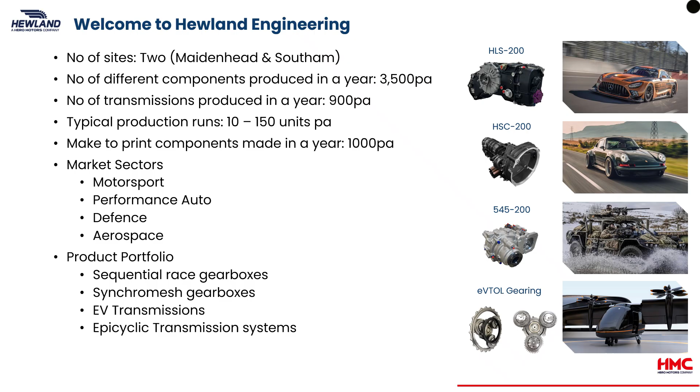Established in 1957, Hewland Engineering provides comprehensive design, manufacturing, assembly and after-sales services from our UK facilities in Maidenhead. In 2024, we opened a new testing facility for product qualification and R&D, aligning with automotive and aerospace standards.

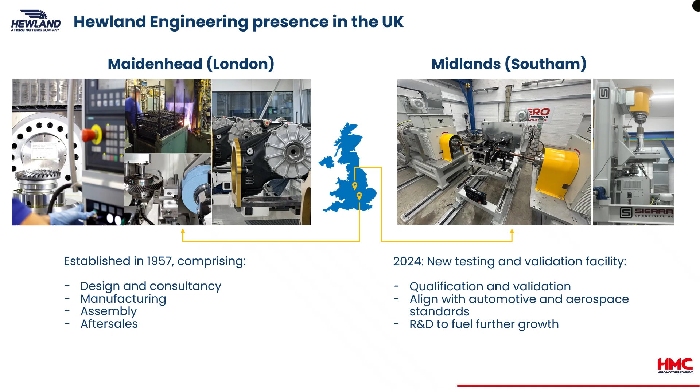Hewland Engineering is also proud to be part of the Hero Motors company business, which comes with a lot of capability in high volume manufacture across various sectors.

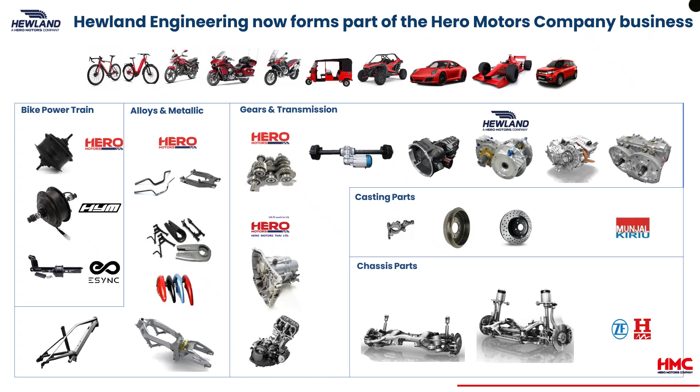Hewland has a rich motorsport history, known for its affordable and competitive products. Historically, this relied on early customer feedback and sometimes leading to pressurized recovery situations. Now, we've built a strong engineering team to deliver the next generation of transmissions, ensuring products reach customers with a robust level of validation for reliability right from the outset.

Our vision is to build the capability for turnkey transmission solutions, optimizing for weight, efficiency and durability. We aim to close the loop on design and CAE validation and support new R&D, aligning with Hero's growth aspirations.

Our goal is to deliver products right first time, accelerate new technology, and become a comprehensive test house for durability, efficiency, strength, thermal, NVH and shift quality testing. We will also offer innovative new services too.

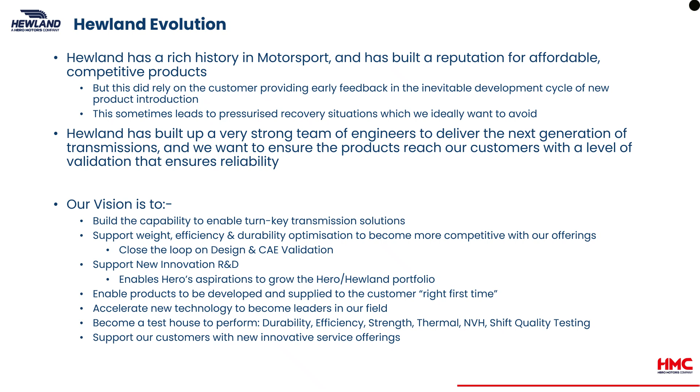Our technical centre has the following test capabilities. The 3E test rig can provide up to 750 kilowatts for efficiency, thermal, endurance and gear contact testing. The loaded 2E tilt rig can run up to 500 kilowatts and is used for horizontal and vertical test orientations, covering the same types of tests as a 3E.

The spin rig has a 34 kilowatt input motor and is used for lubrication, tilt testing, end-of-line spin testing and general transmission checks. Additional facilities include a thermotron chiller, 400 kilowatt battery emulation, flexible test areas and dedicated spaces for assembly, fabrication and shift quality assessment.

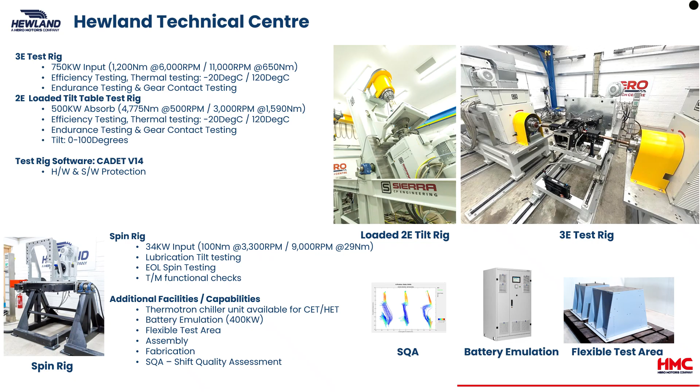Hewland's overall capabilities encompass design and analysis capability, production engineering, manufacturing and assembly, test and validation, and engineering services with a focus on energy management.

Now, let's explore our case study, designing and testing for aerospace applications.

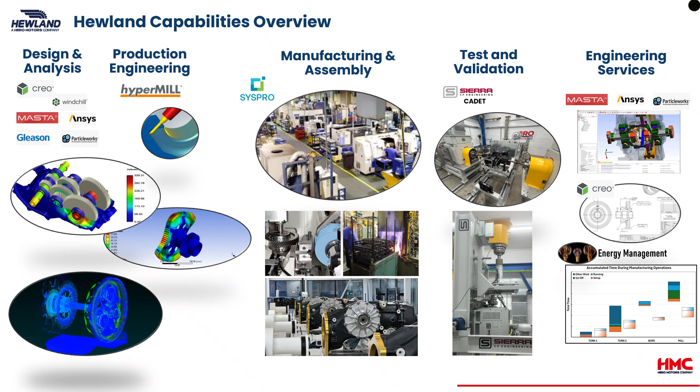eVTOL applications presented Hewland with a unique opportunity, requiring rapid design, manufacture and test validation for a new safety-conscious industry. This demanded swift alignment of our tools and capabilities. We applied Hewland's newly formed design and development processes, using robust test feedback to close the loop on design and analysis. We'll take you through some of the aspects of the project and some of the insights we learnt along the way.

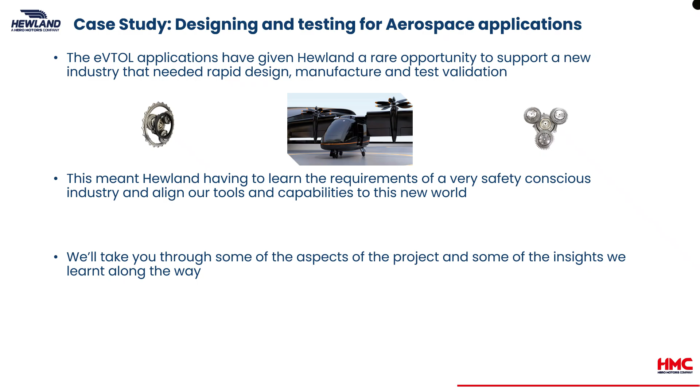Our transmission product design and development cycle systematically moves from targets definition, concept layouts, system design, detailed design, through to production engineering, manufacturing, DVP, and crucially test feedback. Hewland already have a significant amount of tools and documentation integrated throughout our process.

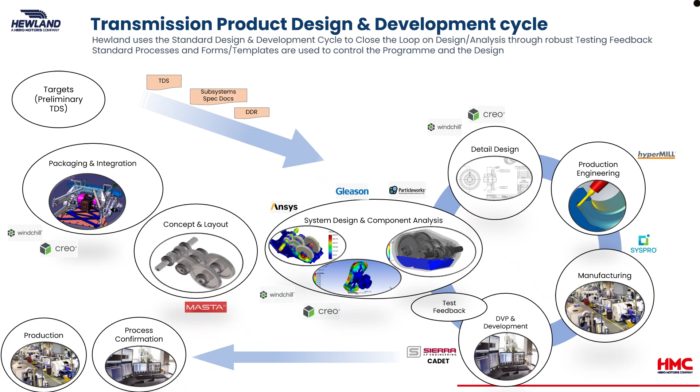The aerospace sector relies heavily on strong documentation and traceability, along with robust mitigation processes. We improved and updated our process and procedures and now have AS 9100 certification.

While our existing design and development process covers many aspects, key differences for aerospace included detailed requirements capture and compliance tracking, increased safety factors, and the method of qualification for durability.

Further distinctions were in flight hazard analysis, preliminary system safety assessments, safety of flight declarations, and paramount was the traceability of components and materials.

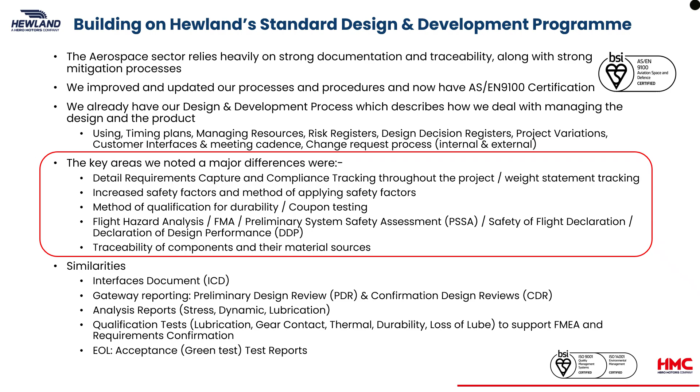MASTA was used to generate and compare multiple layouts based on durability, weight, packaging, and efficiency. We assessed spur and helical gears for potential weight reduction.

Crucially, tooth count and ratio selection was used to balance bending and contact durability, considering contact ratios for NVH, torque density, and efficiency. We carefully selected individual ratios to avoid overlapping frequencies and prevent excitation of natural frequencies within the operating speed range.

For bearing selection, our focus is the right bearing in the right location to react loads and potentially downsize. For planetary systems, spherical roller bearings were found to improve load sharing. The visuals here demonstrate avoiding frequency overlap by discounting problematic tooth numbers.

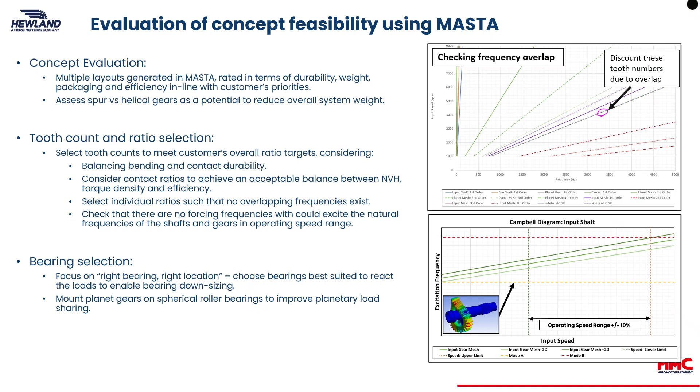In detailed gear analysis, we optimize gear web profiles to reduce misalignment, helping to support the microgeometry design and potentially reducing weight and face width. A key aspect is ensuring gears can be used in both clockwise and counterclockwise transmission systems.

For gear microgeometry tolerance analysis, Taguchi arrays were used to generate candidates, followed by parametric studies in MASTA to ensure optimal performance across manufacturing tolerances. Finally, we reviewed stock allowance and case depth to prevent through hardening.

This slide illustrates using a Taguchi array for candidate generation and early FEA in MASTA, providing critical insights like weight increase and significant misalignment reductions.

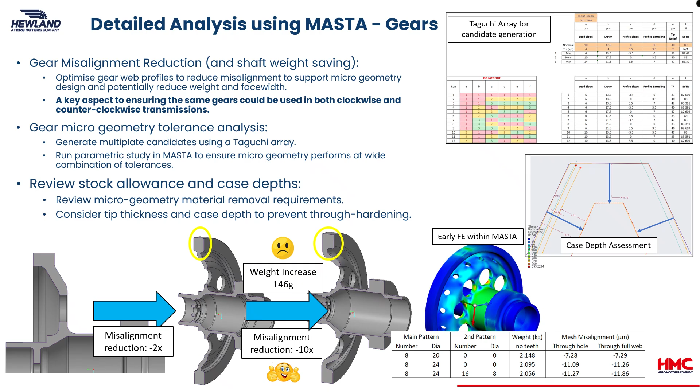For detailed bearing analysis in MASTA, we conduct comprehensive bearing fit and internal clearance checks to prevent radial preload under all operating conditions. We also review oil candidates, assessing viscosity ratio to ensure adequate film thickness, assessing bearing damage to ensure no adverse impacts to fatigue life, and we review gear scuffing and micropitting.

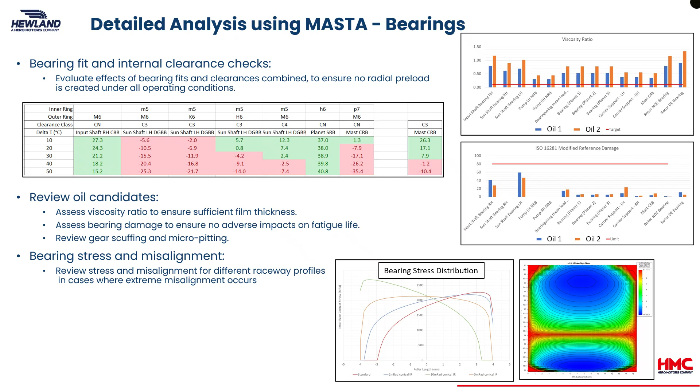Continuing with bearing analysis, we review bearing stress and misalignment for different raceway profiles, especially in extreme misalignment scenarios. The visual shows bearing stress distribution for various raceway profiles.

To ensure safety of flight, conservative stress targets had to be met. All parts had to be designed with significant safety factors against yield and UTS, as well as for infinite fatigue life.

The casing was the most challenging part because of the complex combination of applied loads and conservative stress limits of the magnesium alloy.

Stress limits for the casing were derived from a combination of accumulated fatigue, knockdown, and casting factors. The magnesium alloy was chosen for the casing because of its low density. However, the factors applied to the endurance limit was challenging at 17 megapascals.

A detailed FEA model was created for the complete casing assembly and its connection to the airframe and electric drive unit. The model was set up with multiple load cases to allow comprehensive stress and fatigue assessments to be performed.

Through multiple iterative design loops and close cooperation with the customer, we were able to achieve a design that satisfies safety of flight. A lesson learned is that the increased structural mass added to meet fatigue targets actually offset any benefit of choosing magnesium over aluminium.

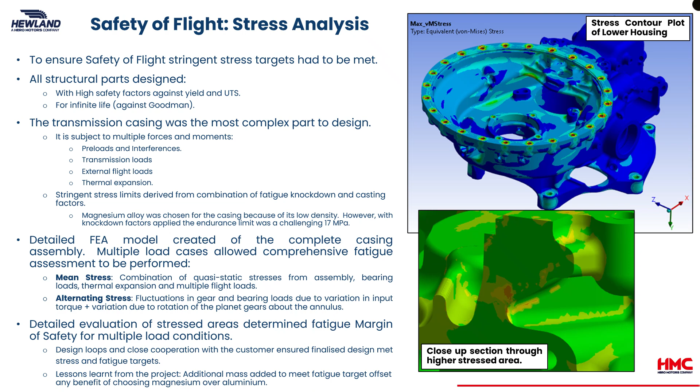Keeping the total weight of the gearbox within the required target was key throughout the design process. Detailed, weekly, up-to-date mass records were kept, showing the contribution from individual components.

To meet other targets, structural mass often had to be added to the components. This required the need to look at mass-saving opportunities across the transmission system.

Design and analysis activities investigated opportunities for reducing mass. This included investigating novel designs for the gear webs and the use of structural optimization techniques.

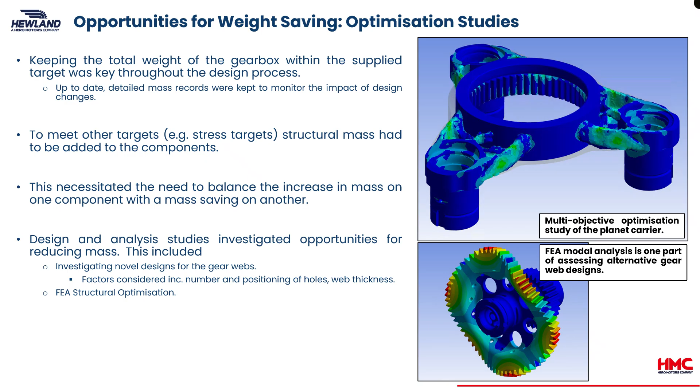For all bolted connections, best practices and the VDI 2230 method were followed to ensure the integrity of joints. To support these traditional calculation methods, detailed bolted joint representations were included in FEA models. Both methods ensured robustness of the connections.

Complex joints often required more in-depth studies. One such example is a large retaining nut on the mast shaft, for which VDI predicts a high embedding loss. The resulting reduction in preload would lead to a risk of joint separation.

For further investigation, leveraging additional calculations and analysis in-house experience concluded any loss in preload would be minimal. To close the loop, a retightening procedure was put in place, which confirmed that conclusion.

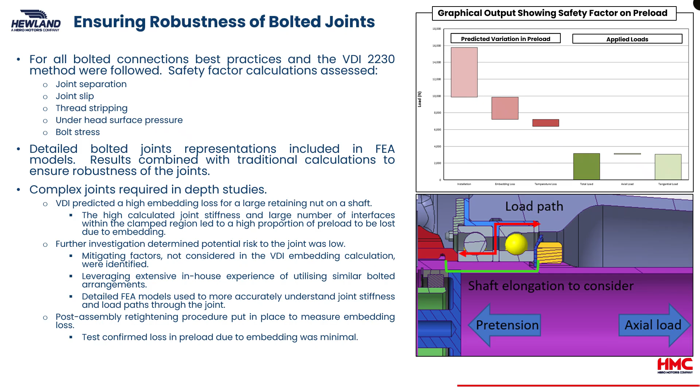Next, our approach to oil management and optimizing oil circulation involved extensive analysis using ParticleWorks software. Through ParticleWorks, we conducted rigorous optimization studies for various flight orientations, which included pitch, roll, and cruise.

Iterative design and analysis loops allowed us to design effective baffles. These baffles optimize the dynamic oil level, reduced captive oil volume, and efficiently redirected oil back to the sump. This significantly reduced initial oil hang-up around the gear train by strategically capturing and redirecting it.

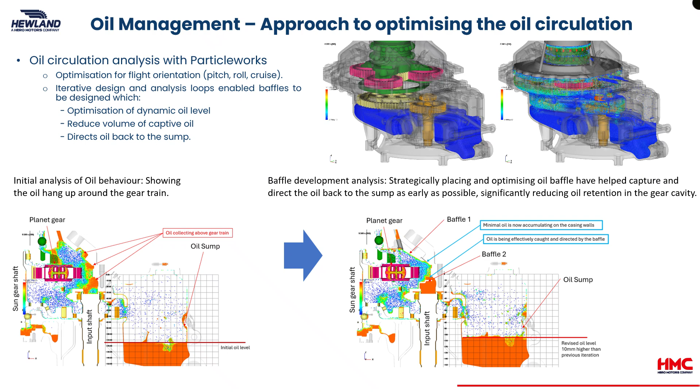The philosophy of gear and bearing durability testing differs significantly in aerospace. Our gearbox was designed for a 250-hour mission profile, but most rotor drive systems follow either Part 27.923 100-hour or Part 29.923 200-hour of the Code of Federal Regulations.

For this demonstrator vehicle, with limited flight aspirations and under extreme monitoring, Part 27.923 was chosen as the more appropriate shorter test. We still wanted to understand the expected damage levels for this 100-hour endurance test for our application.

This 100-hour multi-block test resulted in only 52% damage to gears and 49% to bearings, meaning no observable damage could be accepted. Post-test, all gears underwent Nital etching and were regraphed. Casings were dye-penetrant tested.

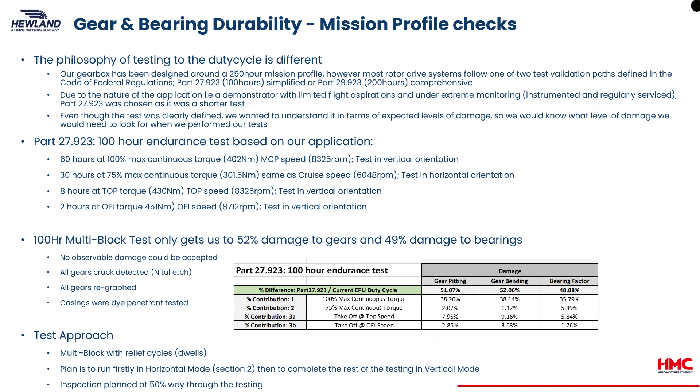Our DVP approach ensured we only advance after fully characterizing and understanding each component and subsystem before we move on. We credit Hofer Powertrain for being able to use their facilities for the early component and subsystem tests while our new Southam Technical Centre was being completed.

Subsequently, we performed gear contact, thermal stability, durability and loss of lubrication tests at our technical centre. For the ship sets, a short end-of-line test was devised for shakedown, followed by a semi-strip down, inspection, cleaning, filter replacement and a reassembly before shipping.

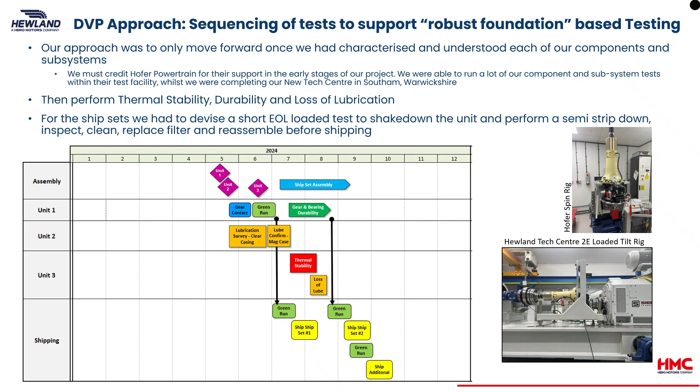3 test units performed the basis of our test development and validation plan. We covered component and subsystem tests such as pump flow rate, PRV checks, mast bearing oil flow checks, jet direction and flow checks, clear casing baffle development, and gear contact testing.

We performed functional tests, including torque to turn, efficiency, and NVH performance. We then moved to the full system durability tests, covering gear and bearing durability, high-speed thermal, and loss of lubrication.

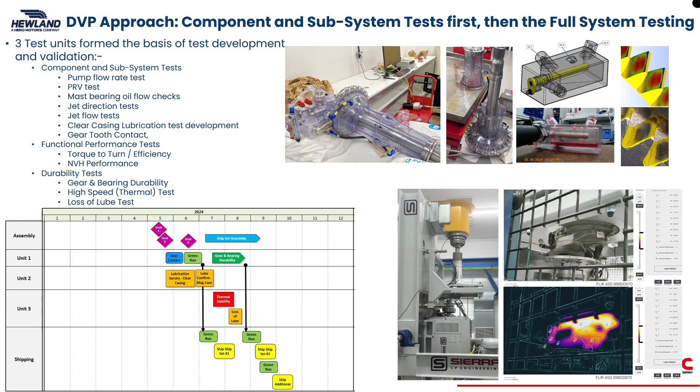Extensive lubrication tests were conducted to evaluate oils across high and low temperatures. We applied a range of oils with varying viscosity characteristics to get indicative performance feedback across different simulated temperatures. The chart illustrates the performance of various lubrication oils against temperature.

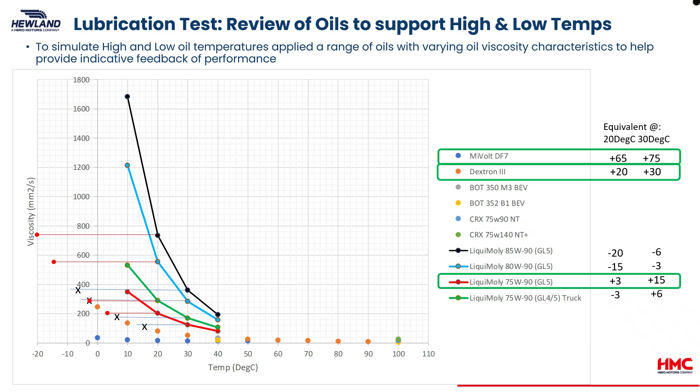The 2E loaded tilt table was indispensable for durability testing, enabling tests in both lift and thrust orientations. We followed stringent processes for the rig's design and setup to ensure accurate alignment to give reliable durability results.

Crucially, torsional modes of the complete assembly were calculated to prevent excitation within the gearbox's operating speed range. During testing, continuous monitoring assessed gearbox performance, including oil temperature and RMS accelerometer data. FFT analysis of accelerometer signals allowed further interrogation of responses at specific forcing frequencies.

Strip-down tests were performed at midpoint and completion. A critical loss of lubrication test was also conducted using specialized shafts to contain damage if seizure occurred. However, the gearbox successfully passed the requirement to be run dry, demonstrating exceptional robustness.

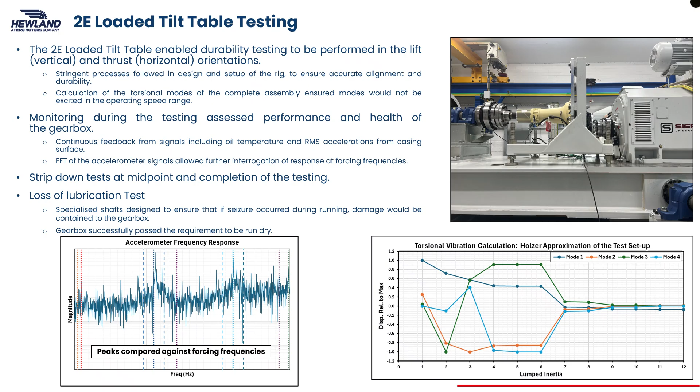Key learnings from this aerospace program include aerospace lead times. Suppliers built in longer lead times for conformance certificates and full traceability. This had a massive impact on our program timing.

Casing material: magnesium's initial weight advantage was offset by the extra material needed for strength and fatigue resistance due to the high safety factors involved.

Traceability required a significant cultural and operational shift, necessitating new processes within Hewland. CAE approaches had to be specifically adapted for aerospace methodologies, especially concerning fatigue and complex bolted joint calculations.

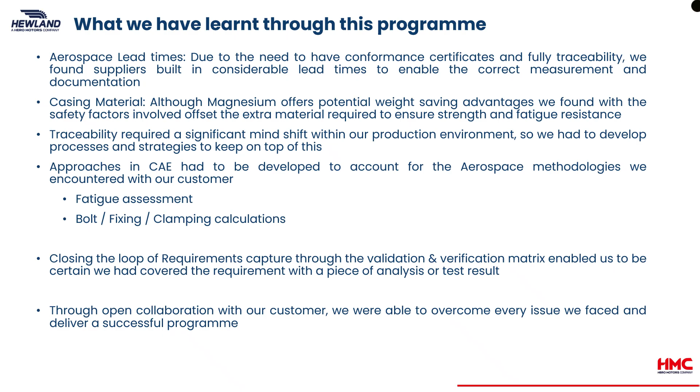And some further learnings: closing the loop on requirements capture via a robust validation and verification matrix was vital to confirm every requirement was met by analysis or by test. Ultimately, open and proactive collaboration with our customer was key to overcoming challenges and delivering a successful program.

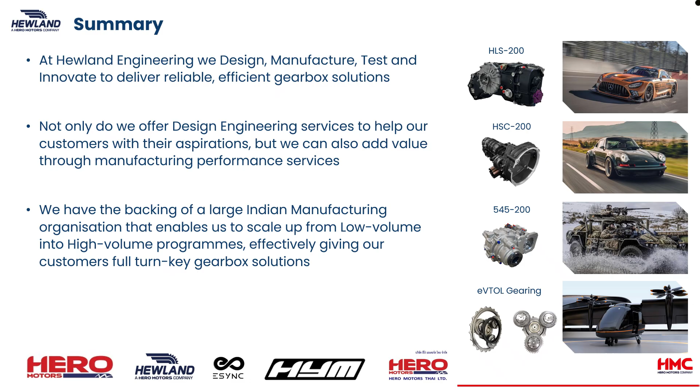At Hewland Engineering, our mission is to design, manufacture, test, and innovate reliable, efficient gearbox solutions. Beyond design engineering, we add significant value through manufacturing performance services. Backed by Hero Motors Company, we can scale from low volume to high volume programs, offering our customers full turnkey gearbox solutions.

Now, let us listen to one of our recent aerospace customers describing their experience of Hewland.

The Hewland team from programs, engineering, manufacturing and quality were a top-tier supplier for the prototype program. Hewland was able to deliver a high quality of work and product in a compressed timeline while seamlessly adopting aerospace-grade processes, particularly in manufacturing quality and material traceability, demonstrating a strong commitment to excellence.

Hewland's ability to iterate on innovative design solutions and quickly adapting to structural criteria, whilst also navigating the complexities of aerospace analysis, was truly impressive.

Throughout manufacturing and testing, the team responded swiftly to anomalies, conducted thorough root cause investigations, and kept progress moving, even under challenging circumstances. Throughout the project, the Hewland team provided timely updates, worked diligently to meet requirements, and collaborated effectively to resolve issues.

Their top-down capabilities from design, analysis, manufacture and testing enabled Hewland to execute the gearbox program at a rapid rate to support the overall aircraft program goals and timelines.

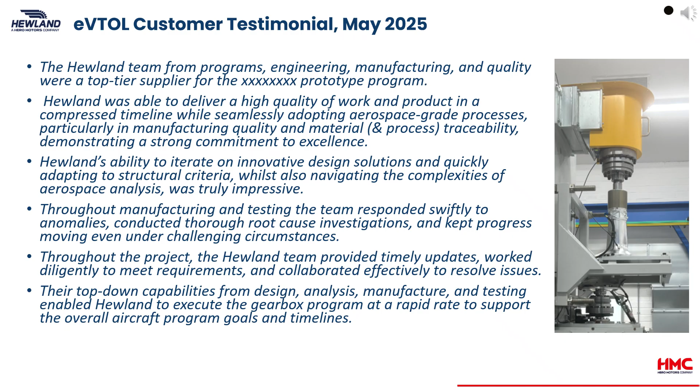Let's outline Hewland's current and future value to our customers. Currently, we offer clean sheet gearbox design and analysis, prototype manufacture, low volume series production, make-to-print services and extensive testing.

Looking ahead, our future includes medium volume series production via Hero Motors and enhanced engineering services focusing on energy monitoring and manufacturing optimization for sustainability.

Our future service roadmap also includes consortium-based testing, EDU testing, a spin rig with 2-axis testing including automation, and park brake testing. A key future service is sustainability and energy monitoring.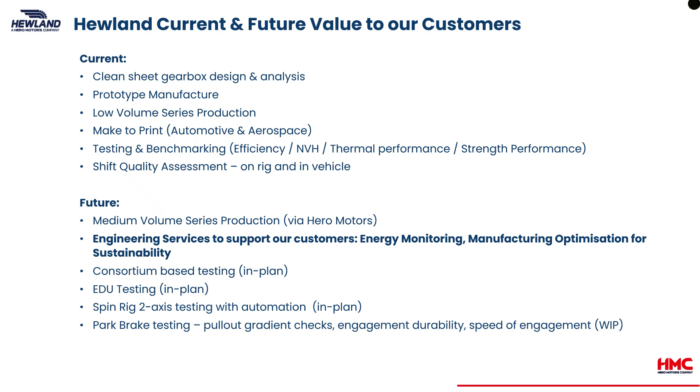Hewland is committed to reducing our carbon footprint towards net zero. Energy monitoring of our manufacturing facility is crucial for reducing consumption, improving productivity, and cutting costs.

Hewland's dedicated sustainability team have implemented activities to reduce carbon footprint and grow towards net zero emissions. A key initiative for reducing energy consumption, improving productivity and driving down costs is our real-time energy monitoring of the Maidenhead manufacturing facility.

Combining the energy data with live up-to-the-minute production information allows key performance metrics to be calculated. The metrics help to identify opportunities for cost saving and process improvements, and once implemented, the impact of these actions can be tracked.

Using a combination of specialist monitoring equipment and tailored software, we can provide similar actionable insights into other manufacturers' facilities to enable them to make smart, sustainable changes to their production.

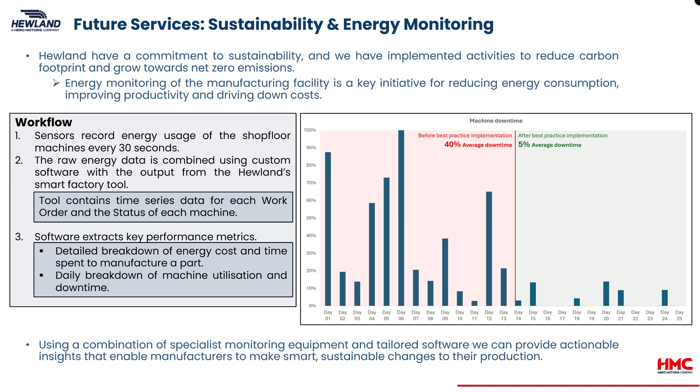The outputs from the energy monitoring include a detailed breakdown of energy cost and time to manufacture each part, as well as daily reports on machine utilization and downtime.

Visualizations help identify cost-saving opportunities by tracking energy consumption and manufacturing time as a work order progresses through the factory. A precise breakdown of the energy cost is calculated at each operation, and actual factory time is compared against scheduled time.

Hewland are currently working with Hard Drive Limited on a research proposal to perform a life cycle assessment on a gear. The proposal will soon be submitted to the BGA for approval.

Key to the accuracy of the life cycle assessment will be the data captured and interpreted by our energy monitoring equipment and custom software.